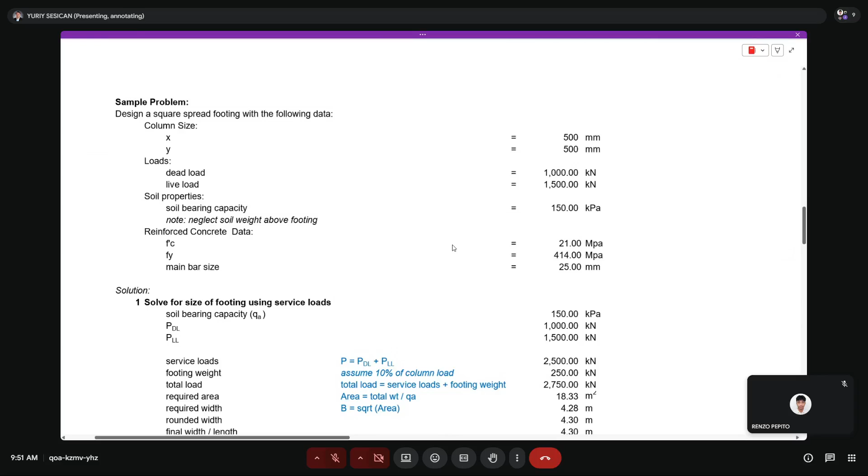All right, part two of our discussion is reading and solving of the sample problem. So let me read it now.

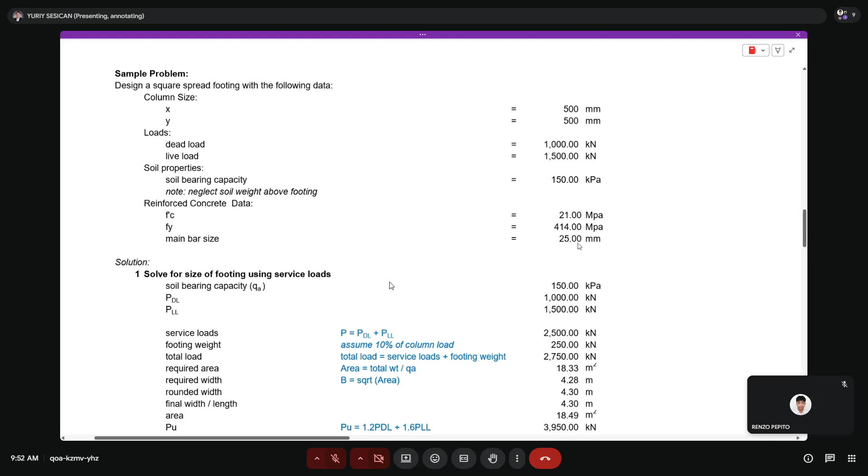Design a square spread footing with the following data. You have the column size 500 by 500, the dead load, live load, and the soil bearing capacity of 150 kilopascal. Then the parameters for reinforced concrete: strength of concrete 21 megapascal, Fy is 414 megapascal, and the size of the main bar is 25 mm. I have divided the solution into steps so you can easily follow.

Step 1 is to solve for the size of the footing using service loads. When I say service load, it's a term for loads with no load factors, so it's simply dead load plus live load.

So the service load is 1,000 plus 1,500, giving 2,500. Then we also have to account for the weight of the footing, since the footing is massive and heavy. We will assume that the footing weight is 10% of the column load, so 10% of 2,500 is 250. That gives a total of 2,750, which is the total weight that the soil will support.

Next is the required area. As we said earlier, stress is force over area, so if you're looking for area, it's simply force divided by stress. That's why you have the total weight serving as the force, divided by the stress designated as QA.

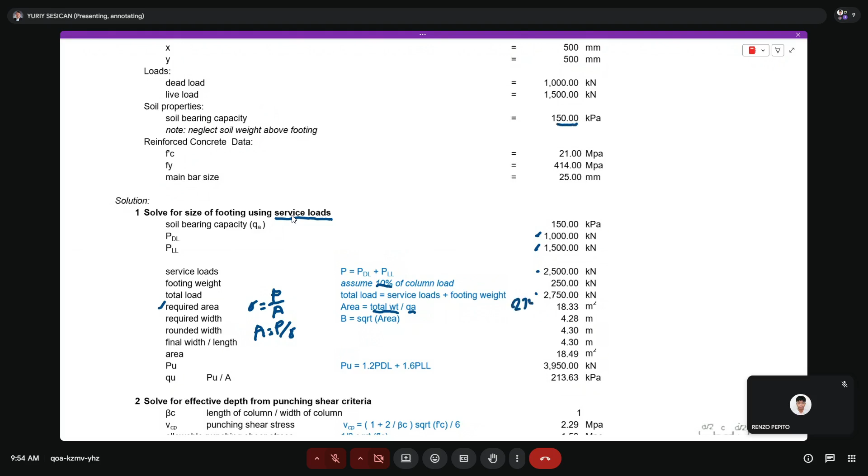So it will be 2,750 divided by the soil bearing capacity of 150, which gives 2,750 divided by 150, generating 18.33.

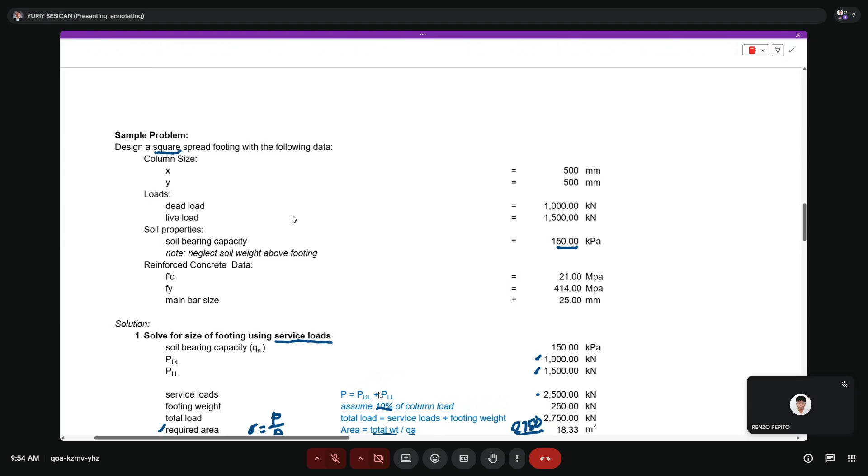In the problem, it is said that the footing is a square spread footing, so since it's square and you have the area already, the width is simply the square root of the area, 18.33, which gives you 4.28.

Now we have to round it up for practical construction application, using increments of 10, so it becomes 4.3. So the footing will now have a dimension of 4.3.

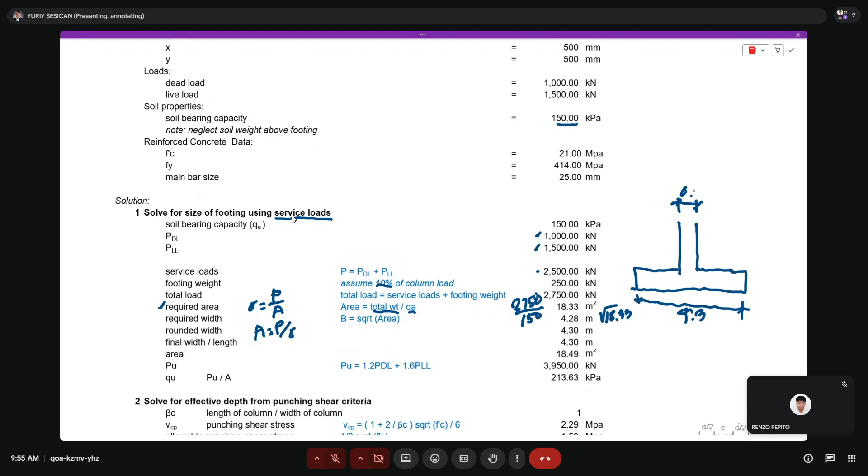So if this is the column, then your footing will have a dimension of 4.3 by 4.3, and your column is also a square column, 0.5 by 0.5. So more or less, we have the size of the footing already.

Since we have declared that the final width or length is 4.3, we square it to get the final area, which is 4.3 squared, giving 18.49.

Next is PU, to calculate PU, this is 1.2 dead load plus 1.6 live load. Well, let me check again, I think I missed something in this.

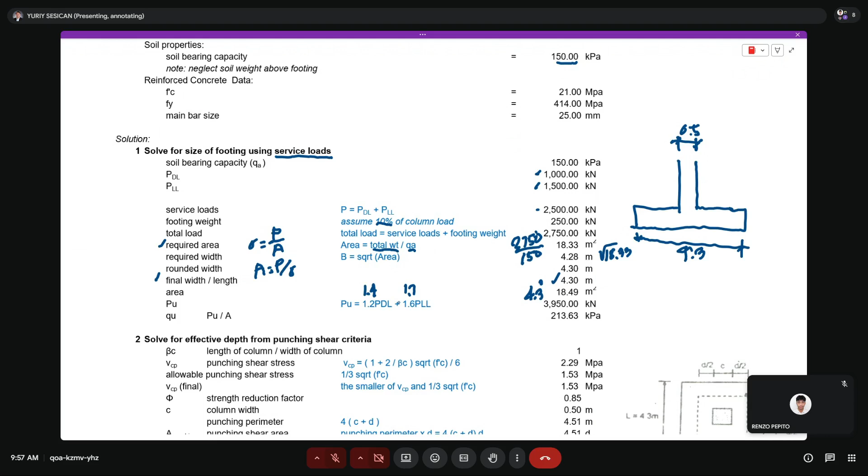Yeah, I wasn't able to edit, so just bear with me. 1.4 is in the formula, but for your application, 1.2 is used. Just remember this is 1.2 and 1.6 because we follow the new code, the old code is 1.4 and 1.7. So when you compute by yourselves, use 1.2 and 1.6, but for this example, I forgot to edit this formula.

So QU is now PU over A, to get the ultimate soil pressure, equal to 213.63. That's just PU over A.

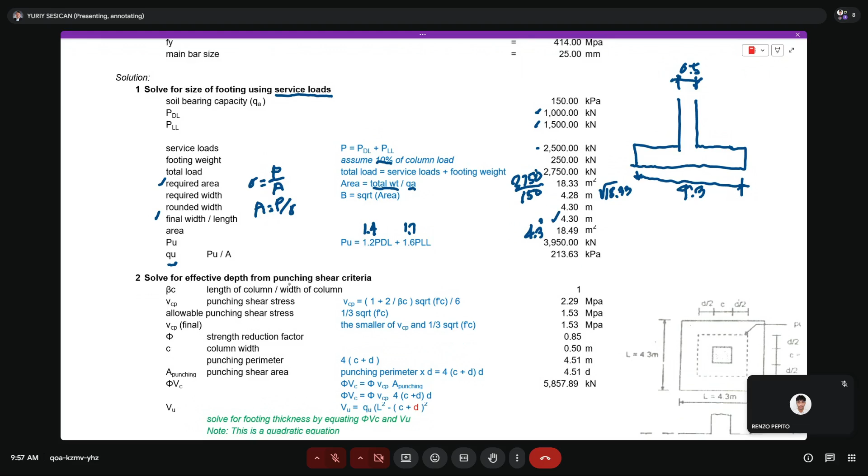Next is to solve for effective depth from the punching shear criteria. What is punching shear? If you have a puncher and try to punch into paper, it will create a hole. I hope you can imagine that.

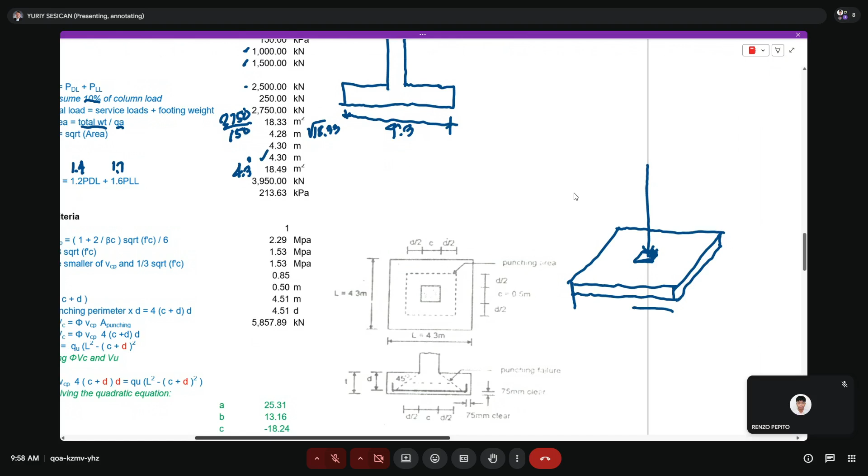The column will punch a hole through the footing. To prevent that, what do we do? We make the footing thicker so it doesn't get punctured when the load from the column is large. So how thick should it be?

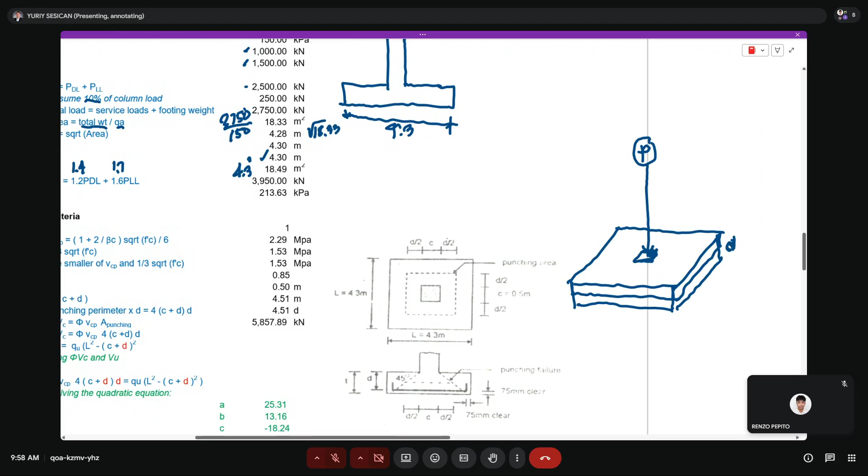How thick should it be? Let's say the variable is D. It will depend on the load that is being applied. So this is the essence of the computation for D using the punching shear criteria.

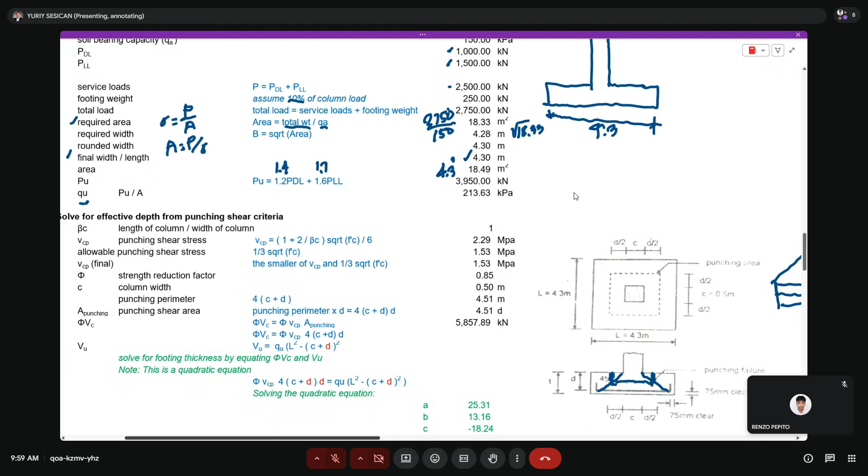So where is the location for the punching shear? You project a 45-degree line towards the effective depth, and the area in the middle of this is the critical section for punching shear. This is where your footing could get punctured if the load from above is too large.

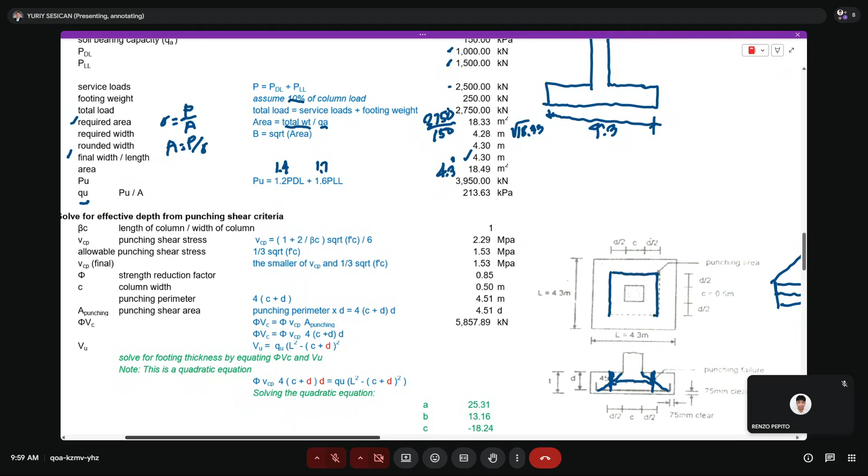It's not exactly at that point, because there's still strength there, so it extends a little further. That's the critical portion. If we project it upward, looking at the top view, this is the critical portion for punching. So to prevent punching, we have to control the depth of the footing, and this is the step where we solve for the effective depth.

First step is to calculate beta C, which is the length of the column divided by the width of the column - the ratio of the length and width of a column. Since our column is square, this will just be 1.

Next is VCP, the punching shear stress, governed by this formula from the code: VCP equals 1 plus 2 over beta C, times the square root of FC prime, over 6. So we get a value of 2.29 megapascals.

Then compare it with the allowable punching shear stress, which is 1/3 square root of FC prime. This has a value of 1.53 megapascals since we know FC prime, as it's given.

Comparing the two, the final punching shear stress is the smaller of the VCP computed using the code formula versus 1/3 square root of FC prime. So comparing 2.29 versus 1.53, the smaller value is 1.53 megapascals. So this becomes the governing VCP.

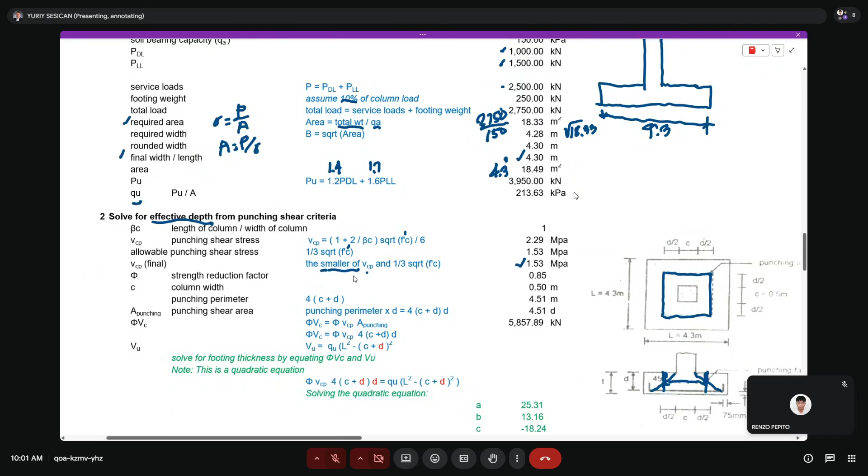Now we will equate the capacity, phi VC, with VU, the applied load. This one is the capacity or section capacity, meaning the strength of the section, and this one is the magnitude of the applied load.

So we will compute phi VC, capital V, and then we will compute VU. Phi VC is equal to phi times the stress, small VCP, times the area of punching.

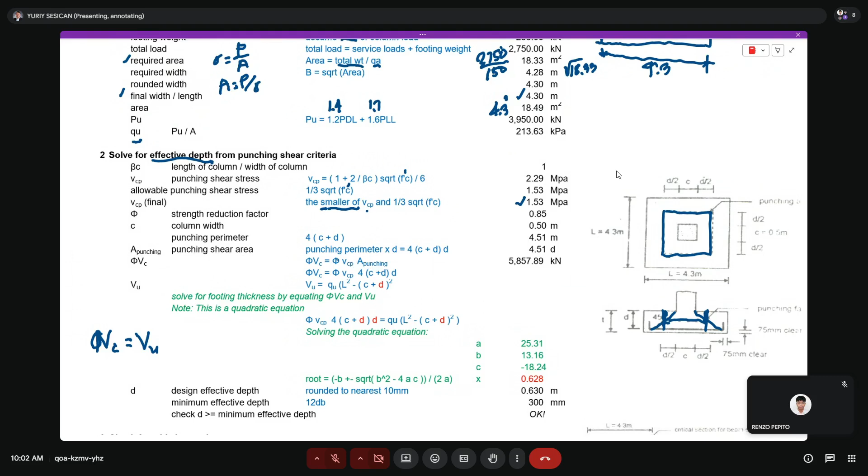So what is the area of punching? Let's draw it in 3D so it can be understood. If this is your footing, the area of punching is this shaded area - let me shade it so you can better understand the geometry.

The punching shear area is this. I hope you are starting to visualize the punching shear area. So how do we compute it?

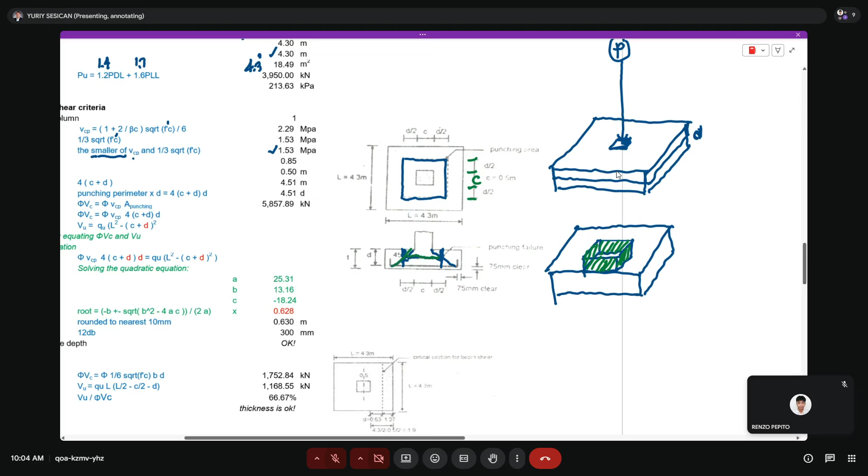From this figure on the top view, since it's projected at 45 degrees, if we divide it like this, C is the column size, and this is D over 2 because it's 45 degrees, with the column in the middle. So this side is D over 2, and the other is also D over 2. So it's simply C plus two times D over 2, which becomes C plus D. So one side is C plus D or D plus C.

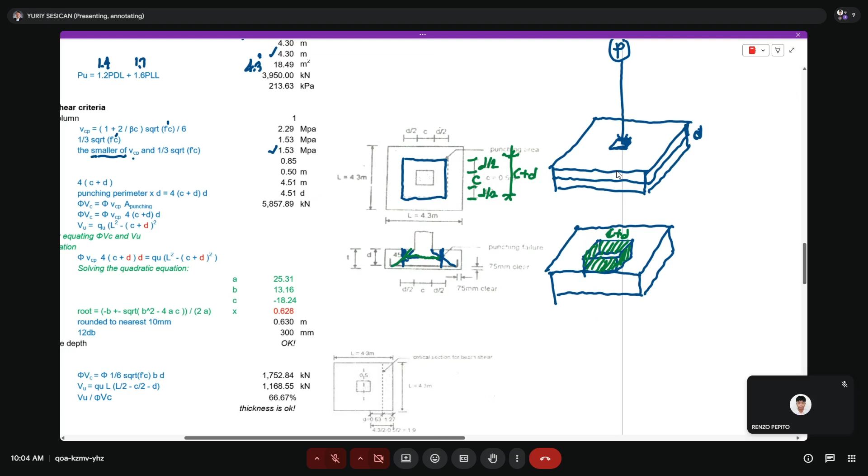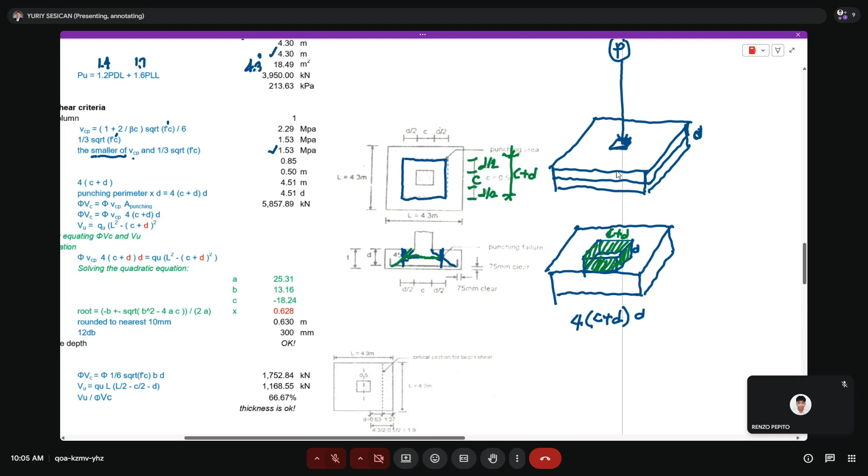So the area of this shaded portion is the perimeter, 4 times (C plus D), times the depth here, which is D. I hope you are clearly visualizing the drawing because this is key to understanding the formulas. So phi VC is phi times small VCP times 4 times (C plus D) times D.

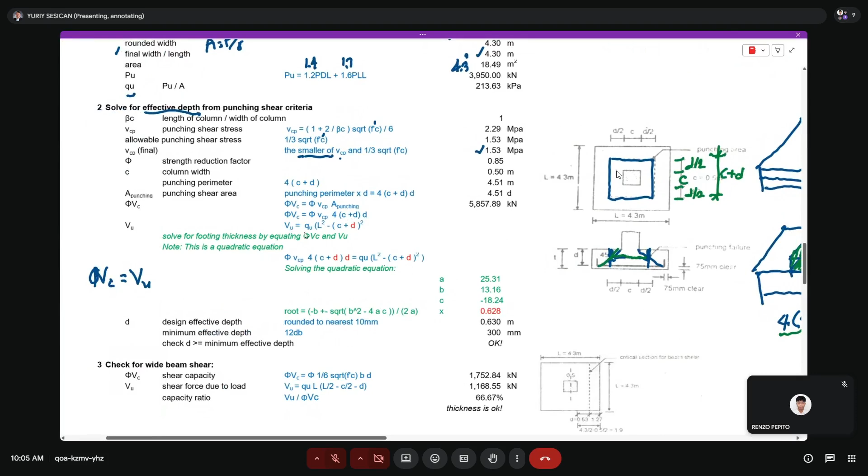Now for VU, how do we visualize it? VU is the applied load. As the soil is pressed down, it will react. Let me draw the footing again to show how VU is obtained.

I'm illustrating this clearly so you can understand it. More than memorizing the formulas, you need to understand the principles. So let's draw the bottom part - assuming it punches a hole, the soil will react.

So the portion of the soil reaction - we minus the center part. The soil will react only on the sides. If we go to the top view, the soil reaction is only there - let me draw an arrow here so it's clearer. The soil will react.

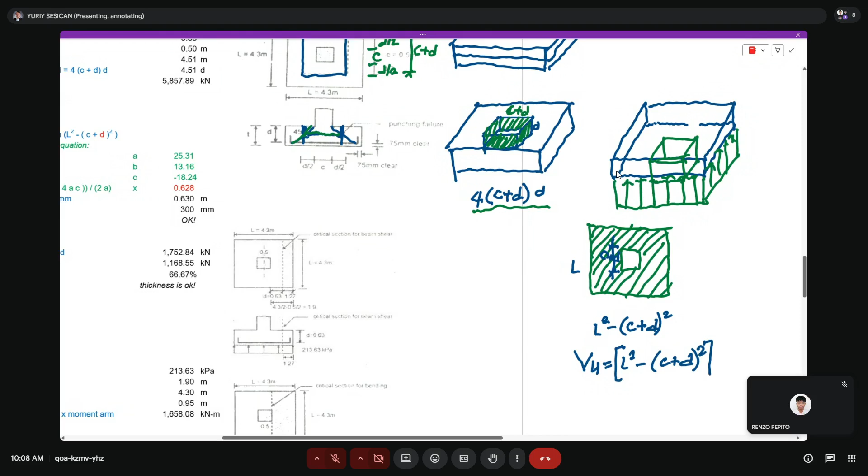Okay, so looking at that, if this is your L, the area is L squared minus (C plus D) squared. So VU is simply equal to the area, L squared minus (C plus D) squared, times the stress. The stress is QU. So let me put the parenthesis and then times QU. Hence this equation here: QU times L squared minus (C plus D) squared.

So we read this as D because D will be your unknown. So let's equate the phi VC and VU. Equating these two, you will generate this equation: phi VCP times 4 times the quantity of (C plus D) times D, equal to QU times L squared minus (C plus D) quantity squared. So this one is just your phi VC, and the other is VU.

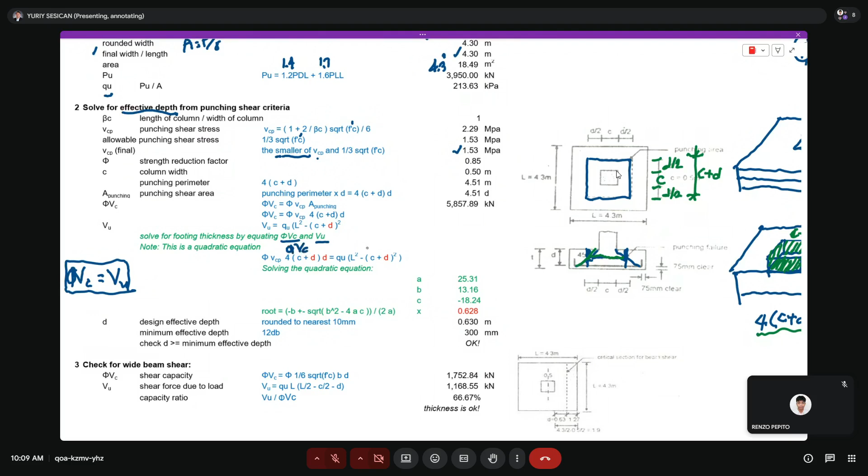So it will be a quadratic equation, because when you distribute the D here, when you multiply the D, it will create a D squared. So it's up to you how to solve the quadratic equation. You may simplify, use quadratic formula, completing the squares, or you can simply use the shift solve function. In Excel, sometimes I use the goal seek function, but for this example, to simplify things, I am using the quadratic formula wherein I obtain the A, B, and C. I simplify the equation and got the A, because the formula is ax squared plus bx plus c equals 0. When the equation is in standard form, you can extract the root by the quadratic formula: negative b plus and minus square root of b squared minus 4ac, all over 2a. So all you have to do is plug in the value for a, b, and c in this quadratic equation, and then you'll get the root.

So in this example, the root is 0.628. You may pause now the video and try to calculate this equation using your shift solve, or simplify it to a standard format and use the quadratic equation.

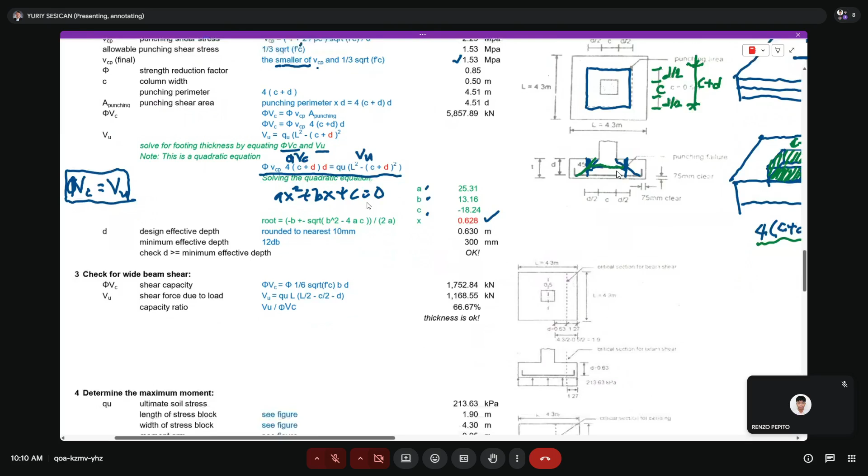Okay, so let us now proceed with step number 3: check for wide beam shear. So aside from punching shear, there is what we call wide beam shear, wherein the beam will be sheared off from the side, like the beam gets split at this part. So for the phi VC, it's governed by the code formula: phi times 1/6 square root of FC prime, times BD. And since we already found D, 0.628, we round off to 0.63.

By the way, before I forgot, 0.63 should be compared with the minimum depth. There is such a thing as minimum depth of the footing. The minimum depth is 12 times the diameter of the rebar, so 12 dB. 12 times 25 mm, that is 300 mm. So is 0.63 bigger than 300 mm? Yes, so this one is okay.

So let me go back now. This is phi VC using the wide beam shear. So why is it BD? Because our footing, let me just draw it here. Our footing is being sheared off at this portion, as seen by this line. So this one is your D and this one is your B. So therefore we use B times D. This is the area, so you generate the answer in terms of kilonewton.